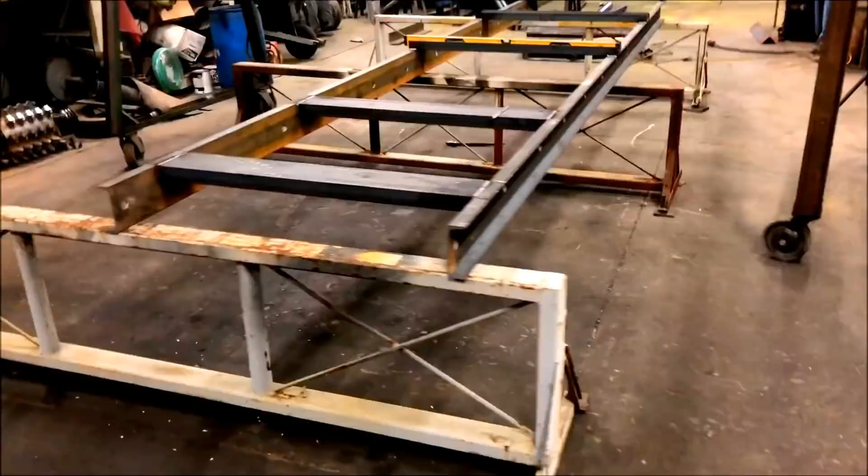Right, here's the beginning of it. We got it all laid out. Checked our diagonals, we're good. We're getting ready to flip it over. Got the bottom welded. How long do you think we've been at this?

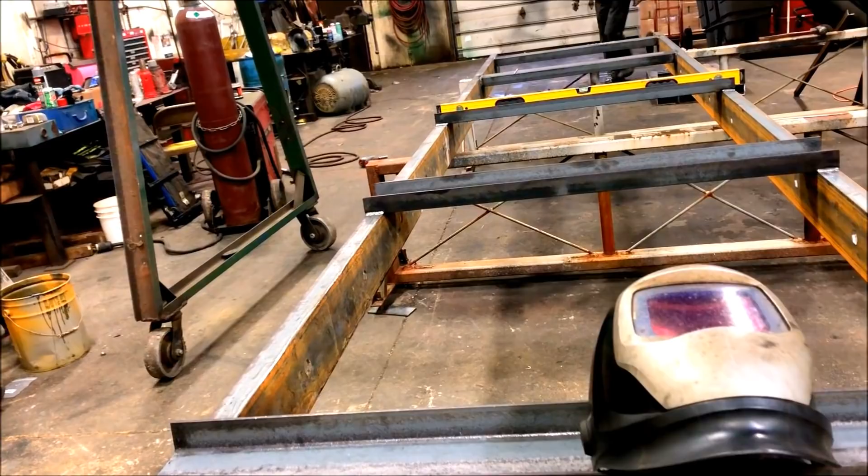An hour? Hour and a half? Yeah, probably an hour and a half. Okay, I'll actually tell you, I've been at it for about an hour and 20 minutes. You've been at it about 20 minutes. Yep, we got it ready to flip.

What do you think, Joni? I think it's worthless. Oh, well, that ain't my department. That's not your forklift. You didn't. Yeah, you ever seen that?

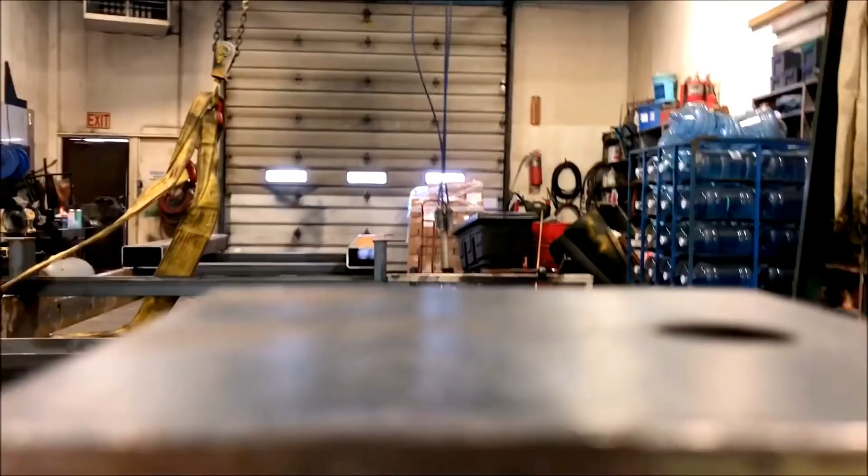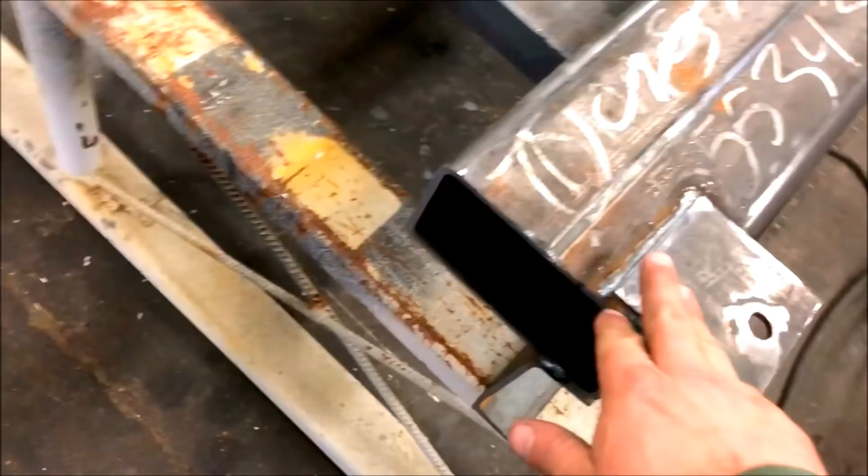So none of that makes a damn. Nope, and we got our fork glides in there, and I'm hoping this adds enough beef to not start ripping on that, but we're only going to move it probably 2 or 3 times in its life. But I don't want it where you can't move them, so that's why we went ahead and spent the money.

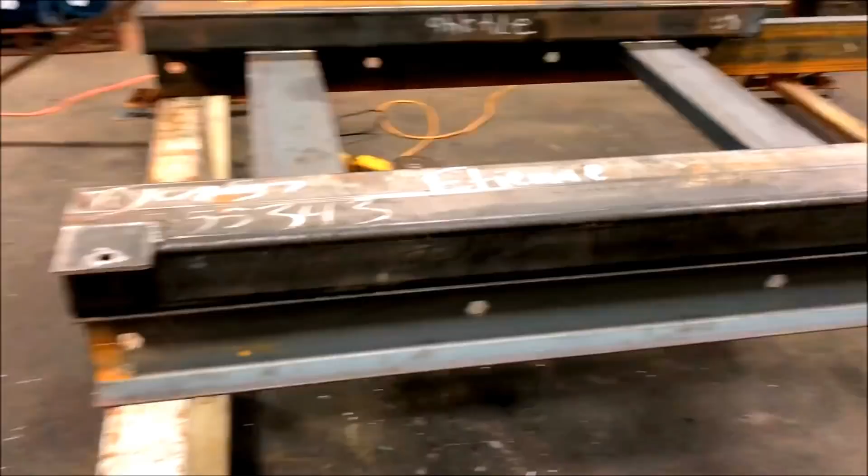How far are you gonna go down in your concrete? About 4 inches. Go in the concrete, yeah, with them all-threads. Oh, I ain't going in the concrete, the all-threads are just to hold the shims together when you pick it up.

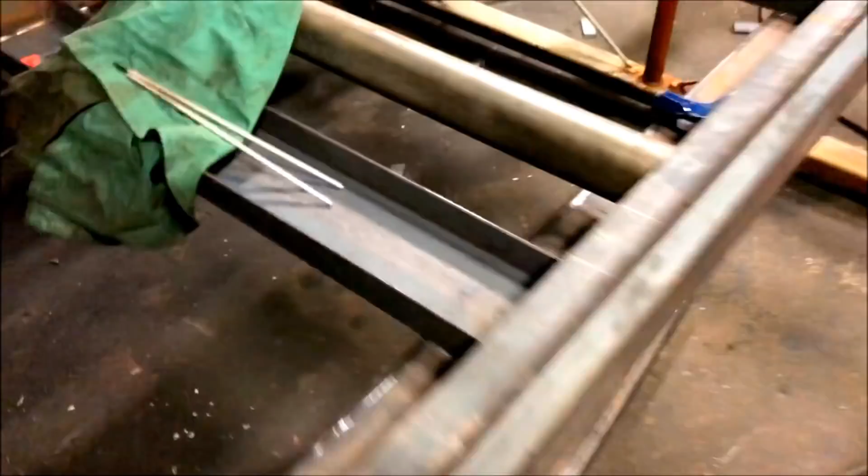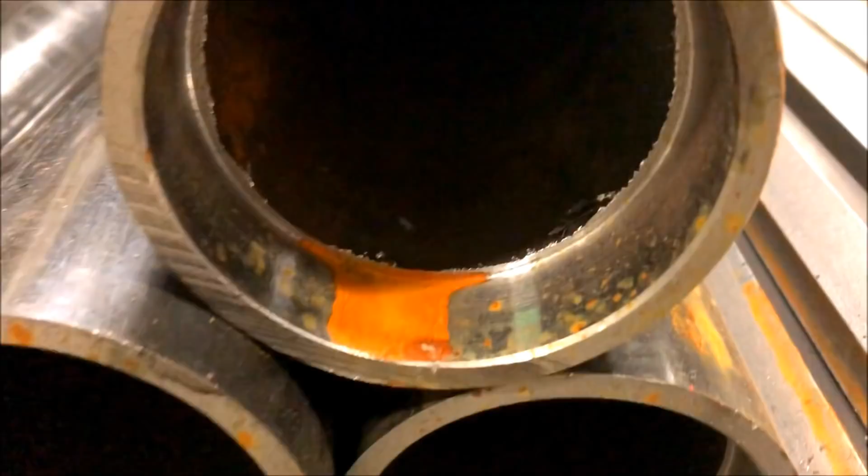Here's how the shafts fit in. So they wouldn't fit in here. So we got a bunch of old rollers, and we're gonna get this thing mocked up and hopefully running Friday. We'll get the old rollers on this and send these back to get them bored a little deeper. See how they are in there? They got to be bored a little deeper for the bearings to set into it.

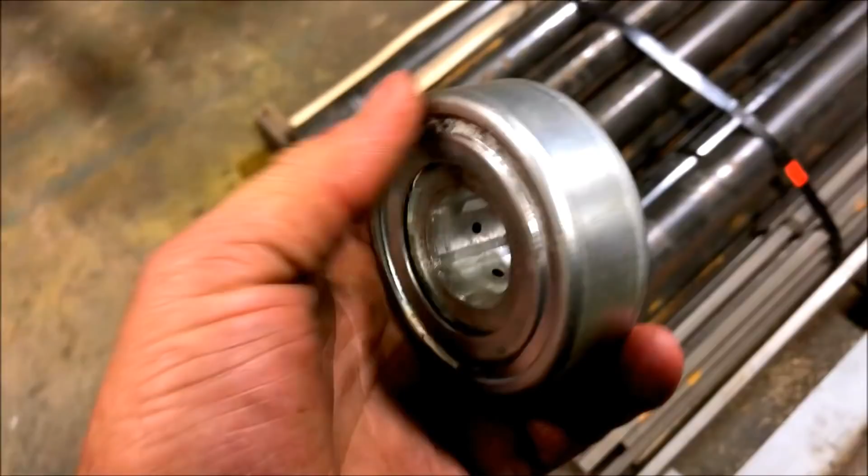See? So we don't want to run it with the hub in because we're afraid with this spinning -- this is how it spins on this hub. Which Robin brought this up, he said that'll sit there and dig into the side of your channel, which is a good point. And that's mild steel, so it'll dig into it pretty good. So that's that issue.

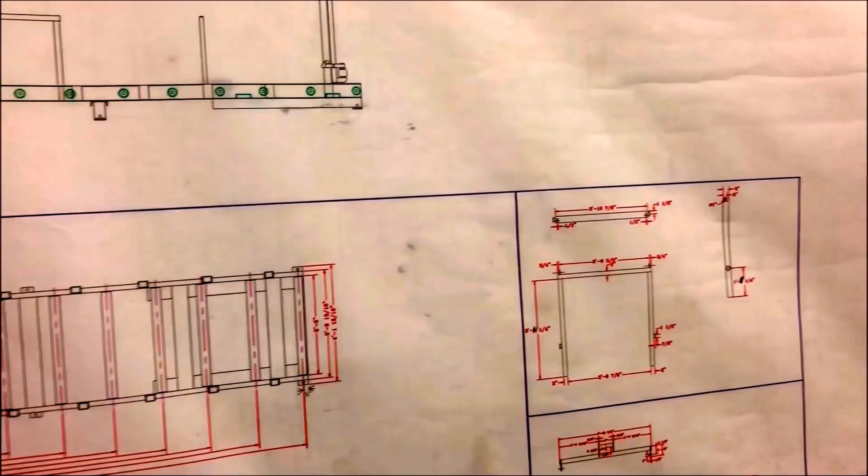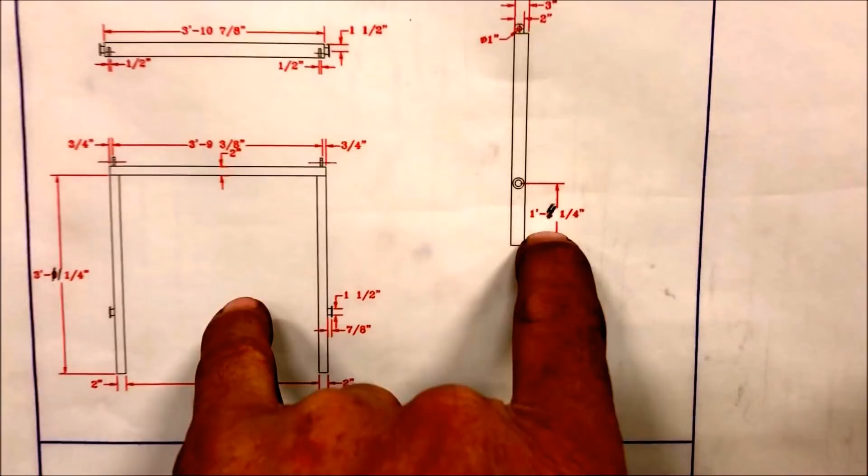And we had a little issue with her height. I screwed that up and ended up having to change that. Revision C, we're gonna get all this done and have to do revision C. I'm gonna have to redraw the thing because I got this stuff wrong. We got some height measurement issues. Where in the heck is it? Well it's somewhere there. Had to take that from a foot 2 1/4, and then raise this up from 9 1/4 up to 3 foot 11 1/4.

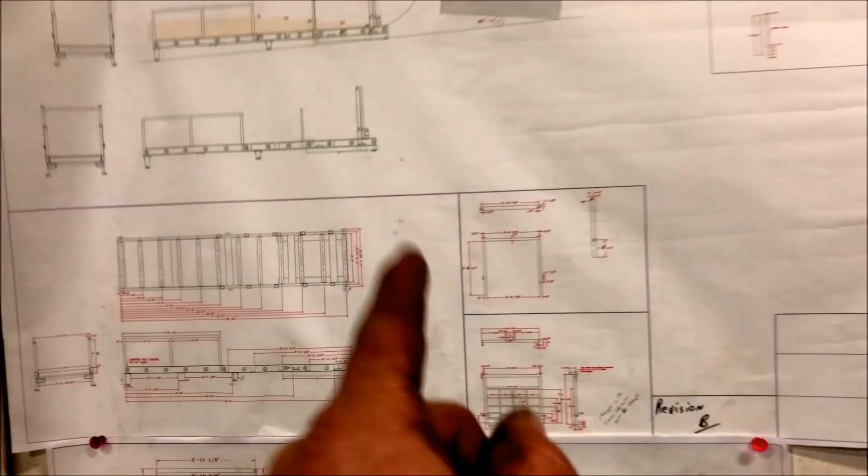And all these dimensions, instead of 2 foot 1, it's at 2 foot 3, and screwed up. Just got in a hurry, screwed up the drawing. As I get older I get less patient for that. I used to sit there and take my time. I'd spend on a project like this almost a full day just crunching numbers after it was drawn, laid out on the table. I'd have the computer pulled up, and I'd be double checking stuff, measuring things, go back down and measure a few things, and make damn sure everything's right before I make the steel order. But you get a little older, you ain't got that day to waste, so you kind of shoot from the hip on that, and it bit us. So here we are adding 2-inch extensions to these tubes and stuff, so that kind of bites you in the butt.

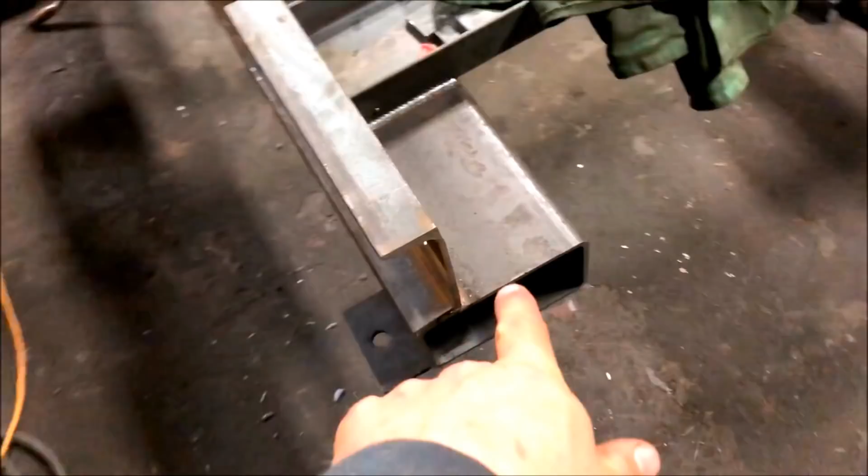But here's what I'm talking about with my fork glides. This here, when it's all said and done, there's still gonna be another roller out here, so the fork truck forks will come in and grab it and be able to pick the whole thing up so we can move them around easy. And that's the idea behind that, because I'm trying to make these movable and flexible and not some cumbersome doodad, so to speak, in layman's terms. But that's where we're at.

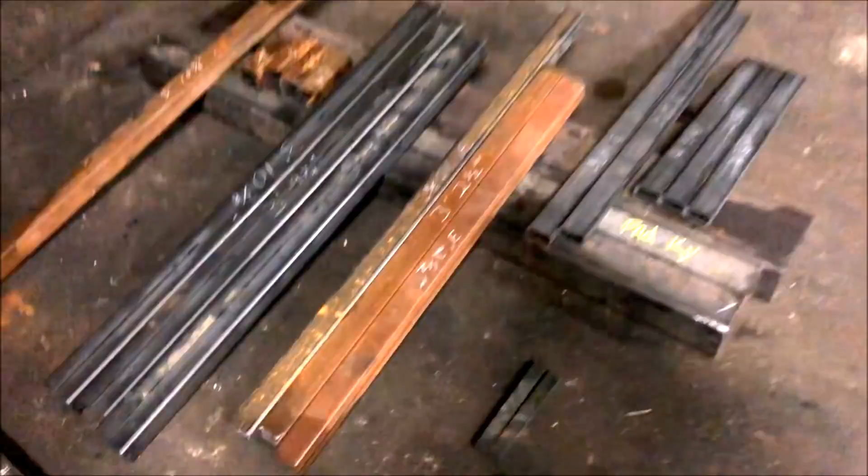And here's the steel Robin's got cut up ahead of us. That is one good thing about prints, is you get this stuff like this. But I want to go.

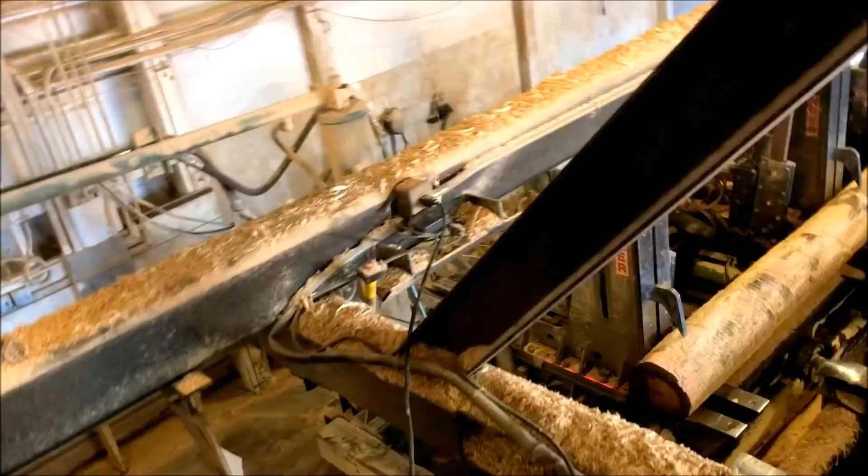Later, guys. Hey, the laser light quit, the green one. Look up the ceiling now. Yeah, oh does it look up the ceiling too? Yeah, it's safe up here, ain't it? Don't you hurt me.

He's gonna saw him along, and then we're gonna back it back up and just line the laser light up with the log. So we figure we'll do that. It ain't off by a lot, but it's off a little bit. And the green's what you want, but all we got is the red, so we're putting red on it for now. Barely see it down there. Now them ones that run this way, they're to see the 8-foot mark, and bring it up here, and we don't use the curtain scanner here.